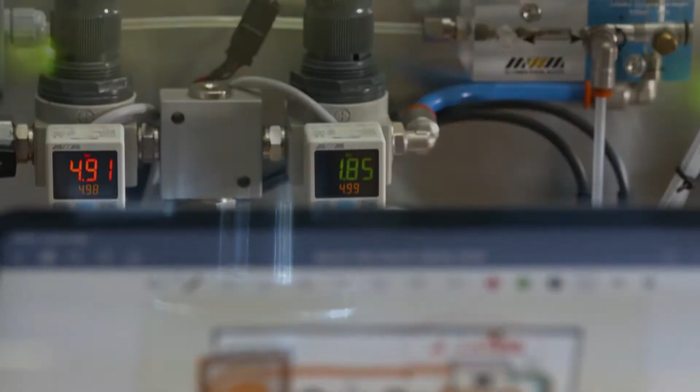MWM Schmieranlagen is an all-Italian story made up of study, insights, passion, creativity and perseverance. It is a story that for over 30 years has brought together creative flair and the rigour of engineering. MWM Schmieranlagen is a company that operates at a very high level of performance in a niche sector: design and production of minimal lubrication systems.

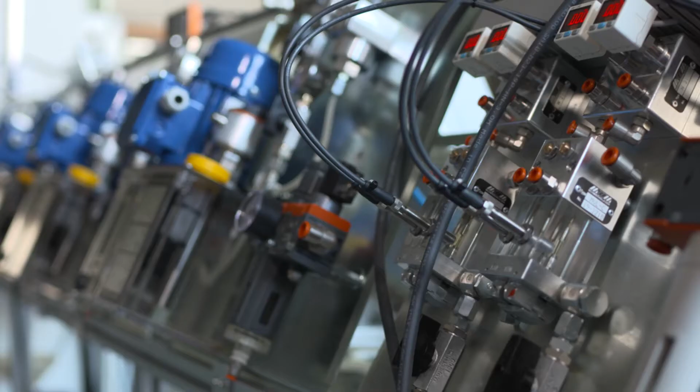These systems are able to deliver a minimum and extremely exact oil metering for the lubrication of high-speed precision rolling bearings.

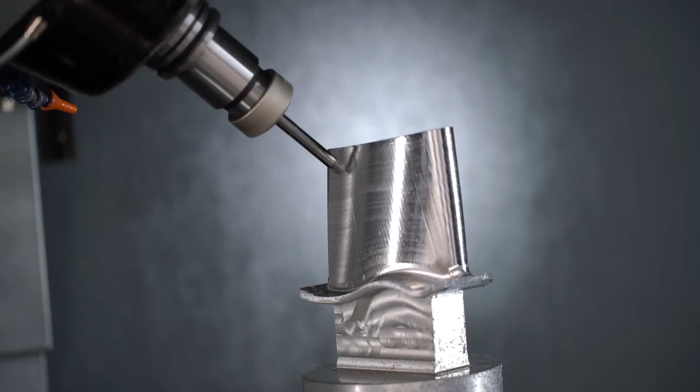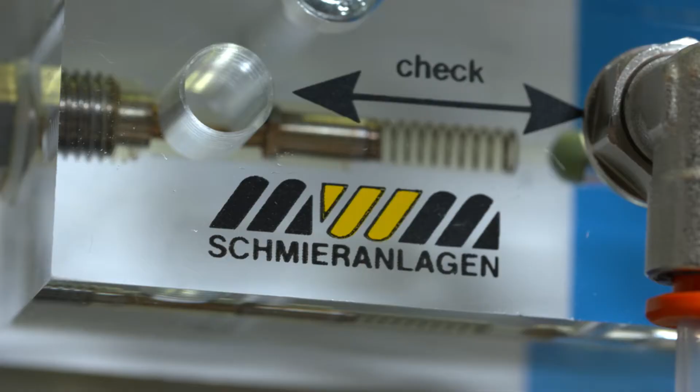Integrating mechanical, hydraulic and optoelectronic elements, MWM produces oil-air lubrication systems with electronic detection sensors. Minimal lubrication is a specialized sector of automatic lubrication technology where tiny quantities of lubricant are supplied in a constant, continuous and controlled way.

In the 1980s, there was still no mention of mechatronics, but I had always been fascinated by the idea of an interaction between mechanics, electronics and information technology.

During my studies, I worked as a sales representative in the clothing industry because I had to take on my father's work, as he had become seriously ill.

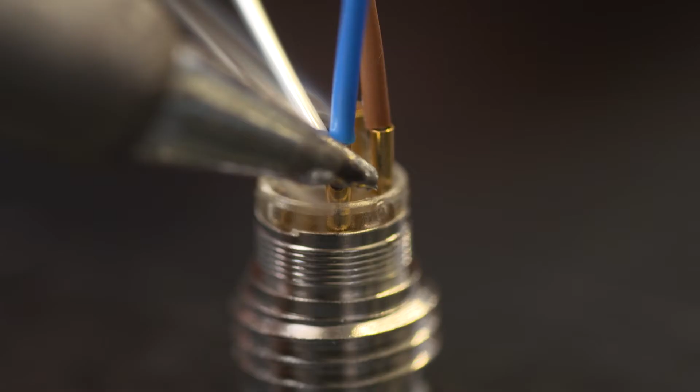Then I made the decision to work also as a representative for a German company that produced lubrication systems. I was fascinated by mechanical engineering, so I decided to continue my studies at university. I enrolled to study mechanics at the Politecnico University in my city, Milan.

I graduated in 1982, specializing in electronic instrumentation applied to mechanics, and this has remained the fundamental theme of my work.

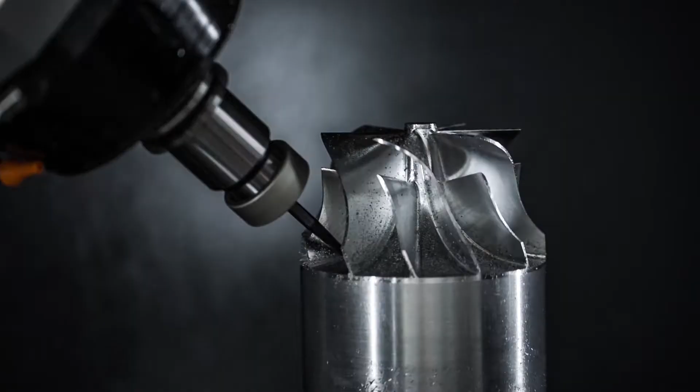That was the time when the first numerically controlled machines and electronics-enabled cars were designed. The goal was to develop diagnostic signals that would allow communication and monitoring in machinery.

I remember one of my university teachers saying to me one day, 'Always do what you're passionate about. Your goal is to become a specialist, but above all, to be number one in your field.'

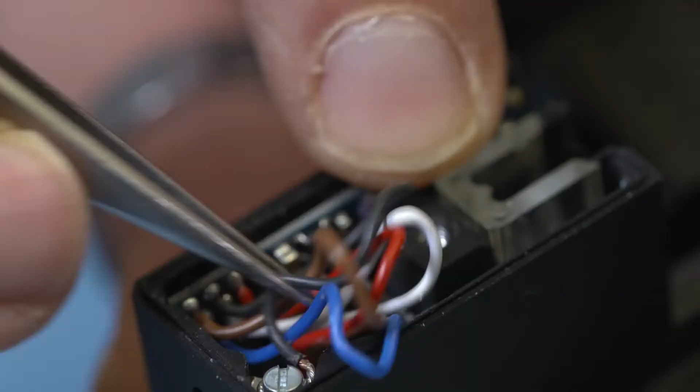As I was already working for a German company that produced lubrication systems, I decided to specialize in this and develop the concept of minimal lubrication.

And this concept was not popular in certain environments where the habit was to use huge amounts of lubricant, and where there was a consequent interest in producing large tonnages.

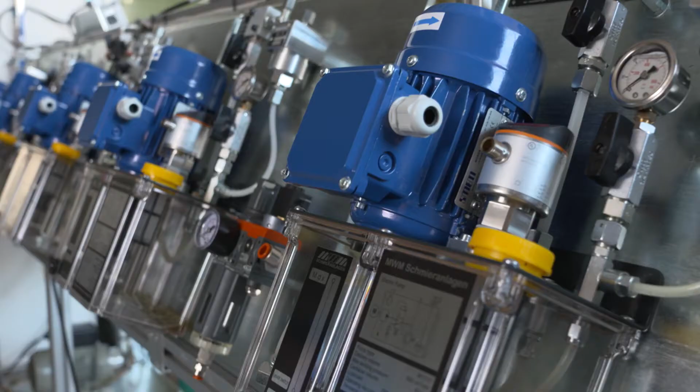That was how we developed the first patents for micro-lubrication, which we later named MQL, Minimal Quantity Lubrication. And then, in the internet era, this also became the name of our website, www.mql.it.

One of our first challenges was to solve a lubrication issue for Ferrari, which had contacted me regarding the lubrication of high-speed bearings in their Formula One engine test benches.

Working at Maranello was a great honour for a young engineer. That was when I understood that to become number one in your field, the secret was to persevere and search for solutions in synergy with the customer.

And to do this, I also had to have a fundamental resource, a research and development facility that would allow me to test and implement my innovative products.

And so it was that I found myself once more at the Politecnico di Milano, where I had studied and grown up.

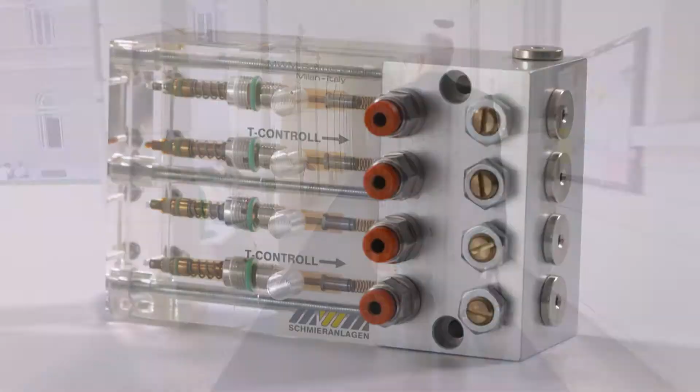And it was thanks to a process of synergic research between the company, its customers and the Politecnico di Milano that the first patents in the minimal lubrication sector came to light. MWM was the first Italian company to patent an oil-air minimal lubrication system with an integrated electronic detection device.

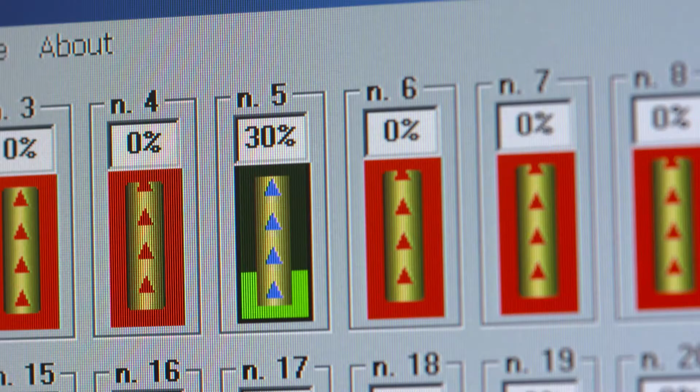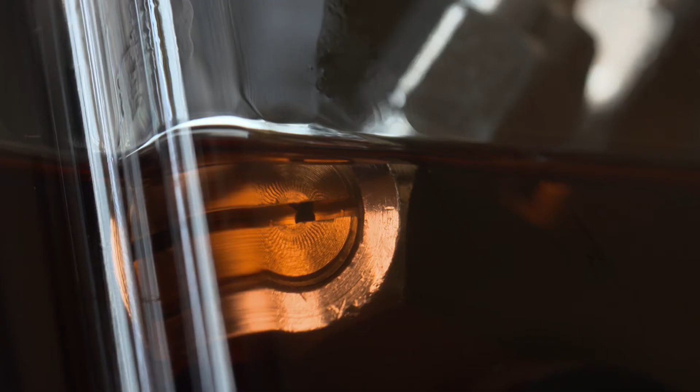This technique allows us to combine high performance, efficiency and respect for the environment. Minimal lubrication, MQL, requires far less lubricant and causes less pollution than either mist systems or recirculating oil lubrication systems.

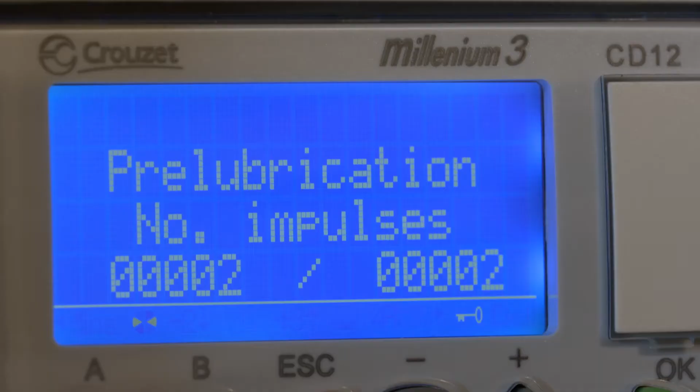We work with micro flow rates by using volumes of just hundredths of a milliliter per hour distributed constantly and continuously. For example, a flow of about 3 drops of oil per hour.

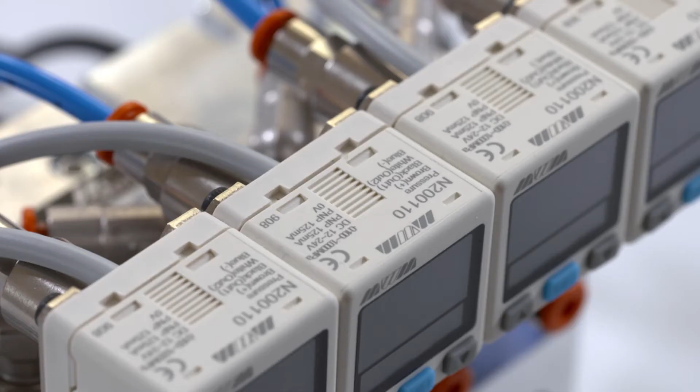And it is the MWM mixers and systems with their own control sensors that enable us to manage the supply of tiny quantities of lubricant with great precision.

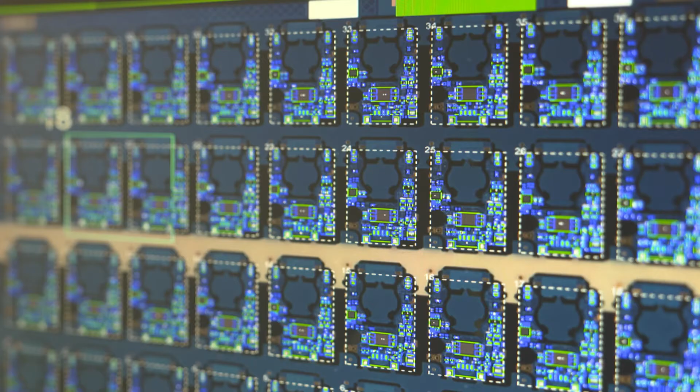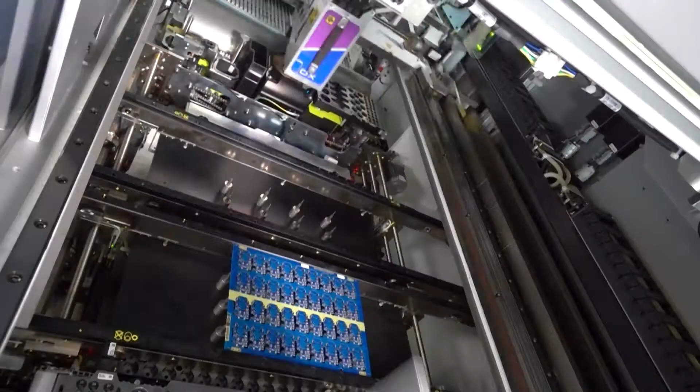Our sensors and electronics are built by a strategic partner which is of great importance to us, BTSR, world leader in the production of electronic sensors, produced with cutting-edge technology and assembled and tested one by one in an air-conditioned and constantly controlled environment.

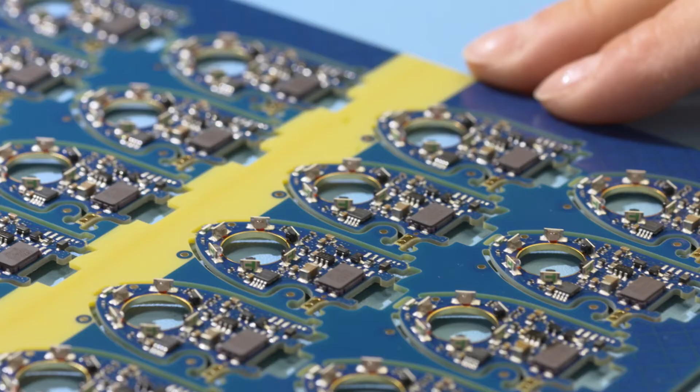The patented MWM oil/air mixer contains an optical sensor that detects the small quantities of lubricant supplied using a precision dosing element.

These small volumes of lubricant are fed by a blast of compressed air, so as to generate a continuous minimum flow of lubricant to the lubrication point, normally a high-speed bearing.

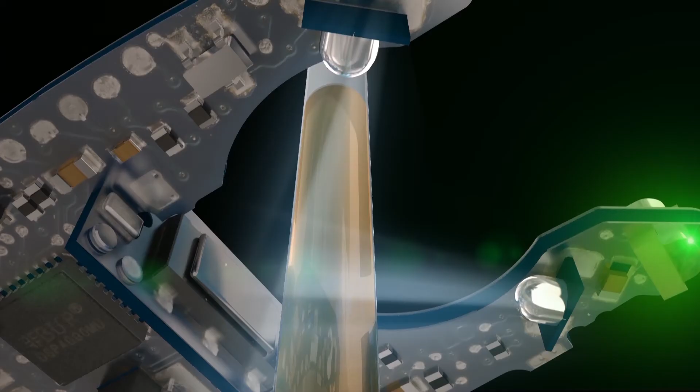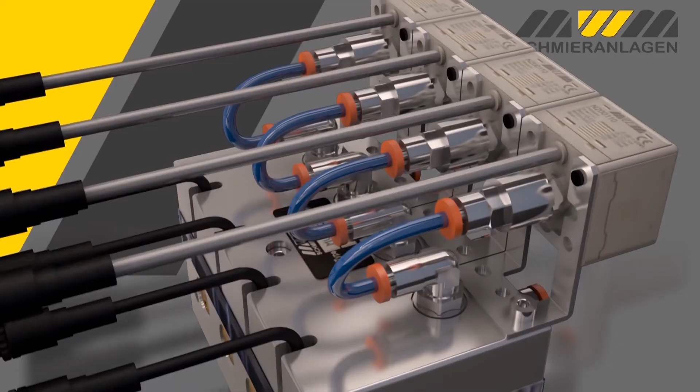This ensures the continuous detection of the flow and of the whole lubrication system. This allows higher performance and minimal use of lubricant, avoiding overheating due to hydrodynamic friction, a continually monitored technology enabling a constant minimum operating temperature.

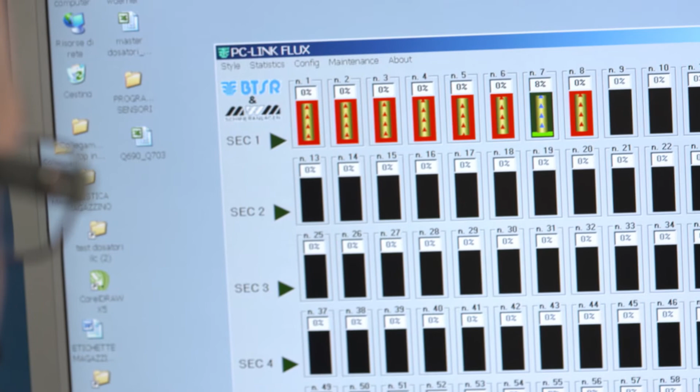Thanks to the customization of the detection software, MWM is able to conceive different systems for each request. MWM products combine craftsmanship and high technological standards.

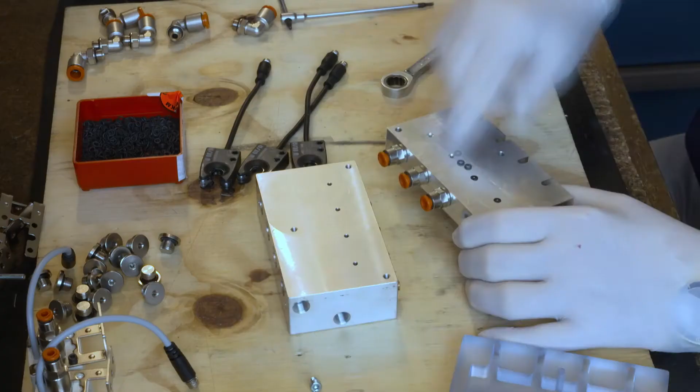Each MWM minimal lubrication system is assembled manually with individual components which are the product of highly advanced technologies. For our customers, production must be continuous and monitored, minimizing any production downtime so as to avoid unnecessary costs.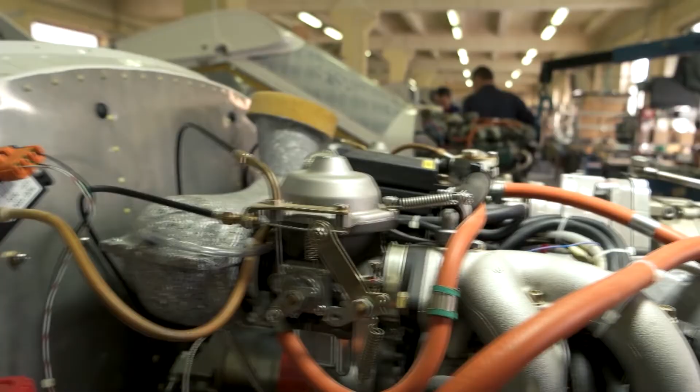We offer our services to the automotive and aerospace industries and to all other fields involving high-speed applications, such as centrifuges in the chemical industry.

We're present in all the most important production centres worldwide, above all in Germany and in the Asian market, Japan, Korea and China, and obviously also in Italy, where our company was born and grew up.

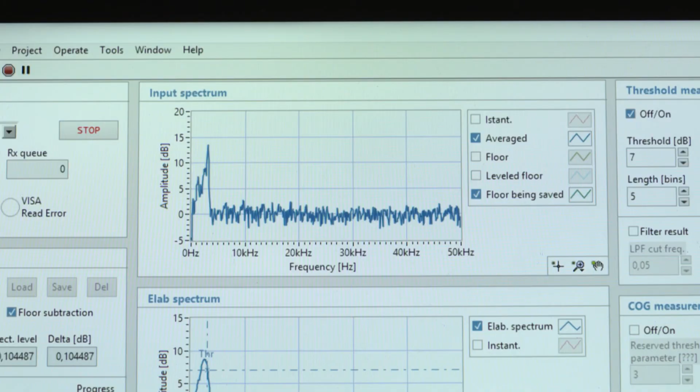Over the years, we have developed new research projects in collaboration with the Politecnico di Milano, leading to new international patents, such as the laser sensor for measuring quantity of lubricant and optoelectronic sensors for measuring small flow rates of lubricant in oil mist mixtures or oil mist.

Among the various services, MWM provides its customers with a series of backup systems which can be sent out within 24 hours from the request.

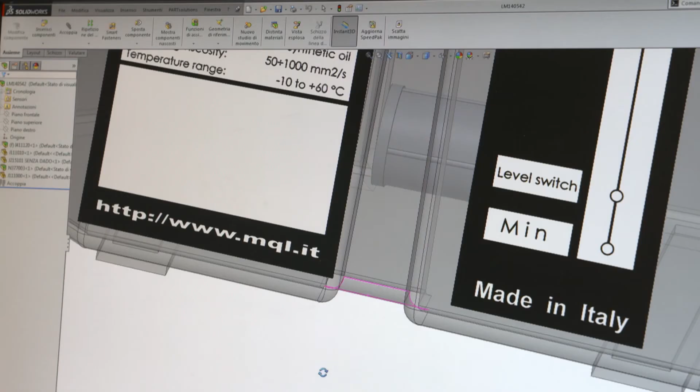But it is research and the constant challenge of finding high-performance solutions which have made MWM Schmieranlagen a leader in the manufacture of compact minimal lubrication units for high-performance industrial machinery.